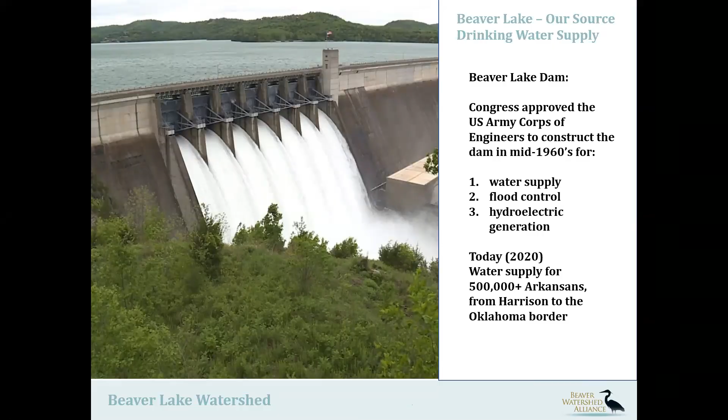We do quite a bit of education and outreach. We reach over 25,000 landowners through mailers, programming, and our e-news. We also host these quarterly speaker series and BMP workshops, field tours, and farm days on site to work with landowners directly on implementing best management practices. We help install native plants and trees and other best management practices along riparians and critical landscape areas.

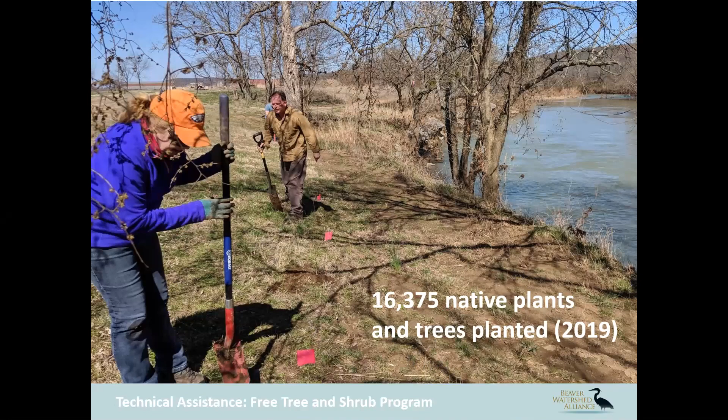We also do a lot of scientific investigation, working with partners to understand some of the issues and challenges we face, such as sediment, which is the number one pollutant in the Beaver Lake watershed area. We also help to remove low water crossings and reconnect miles of streams.

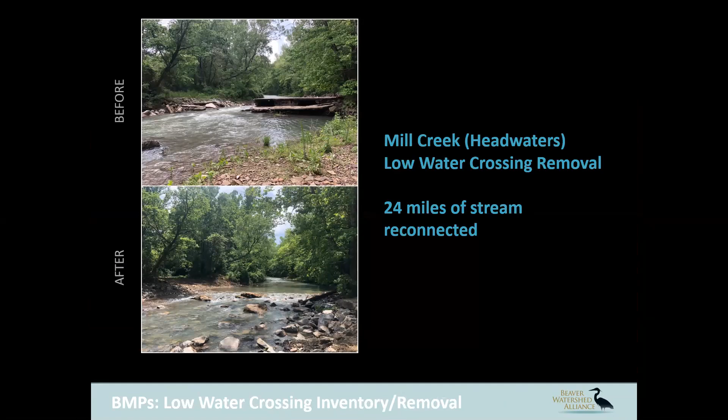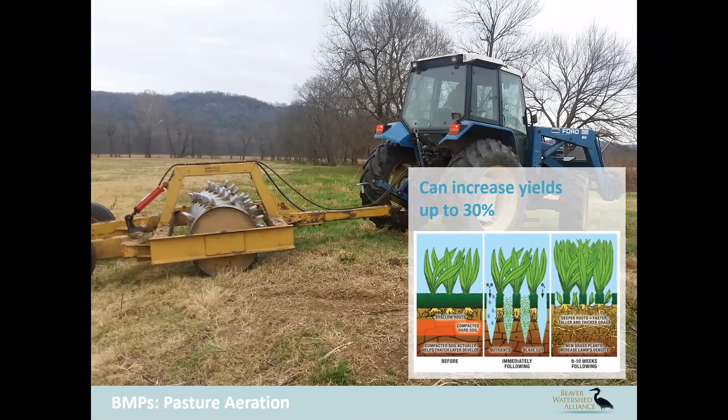Our watershed is primarily forested, about 70% forested area, so we work a lot with landowners, cities, and counties to manage forests. We also help farmers with pasture aeration to help water soak into the ground and increase their forage and production. And we offer on-site technical assistance at the parcel level.

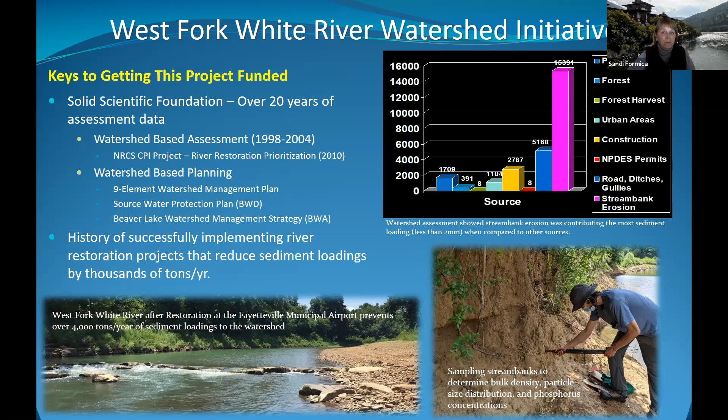Then our organization, the WCRC, with partners, we've been successfully implementing river restoration projects in Northwest Arkansas for more than 10 years. And we've quantified the reduction of sediment loadings. So those items, I think, played a major role.

Then another part was that we had a history of strong partnerships in Northwest Arkansas, and even specifically in the West Fork White River and Beaver Lake watershed. And we used the data to support measurable outcomes.

That's how we were able to bring in a lot of the partners. They wanted to see, well, if we give you this money, what kind of results are we going to have? How is it going to improve the watershed? And then we used the federal funding to leverage non-federal funding and vice versa.

And we also developed clear partner roles and commitments. So if you decide you want to apply for an RCPP project, I'm not sure if they still require this, but at the time we applied, you actually had to have a letter of commitment for your partner funding. And in some cases, that can take up to a year to get that level of commitment.

And then the project is located in Beaver Lake watershed. This is our drinking water source for Northwest Arkansas. So it's a very important resource that needs to be protected. And that played a major role, I think, in us getting selected.

And there's several 303D listed streams. It's a non-point source priority for nutrient reduction.

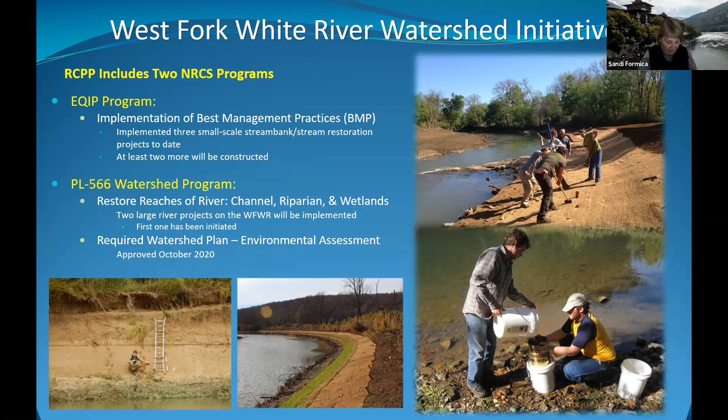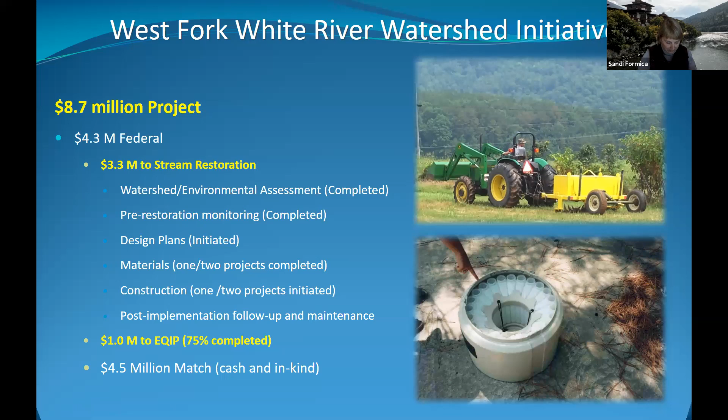The funding we brought in through this RCPP was $8.7 million. 4.3 million of it is federal dollars, and the match for our application was 50-50, so we had a little more than that, 4.5 million in match. 3.3 million of the federal dollars is going towards stream restoration, and 1 million went towards EQIP, and we've completed about 75% of the EQIP funding. So that's an overview of the West Fork White River Watershed Initiative, an NRCS RCPP project.

Now I want to talk about our restoration approach, which I believe also helped us get this project. We use natural channel design principles to develop designs that restore the channel, riparian, and wetland areas for unstable reaches of rivers and streams. I want to describe this in two parts. Channel restoration first—a lot of times I believe too much emphasis goes on this. It's important and has to be done right, but we also need to consider how we're going to restore the riparian areas. The channel restoration is based on stream form and stable reach examples.

We restore the hydrology, wanting better defined riffles, runs, pools, and glides that provide habitat and also help treat water. We account for sediment transport. These projects require extensive permitting that takes months and sometimes longer. We stabilize stream banks—the end result is stable stream banks. Almost every project requires heavy equipment construction.

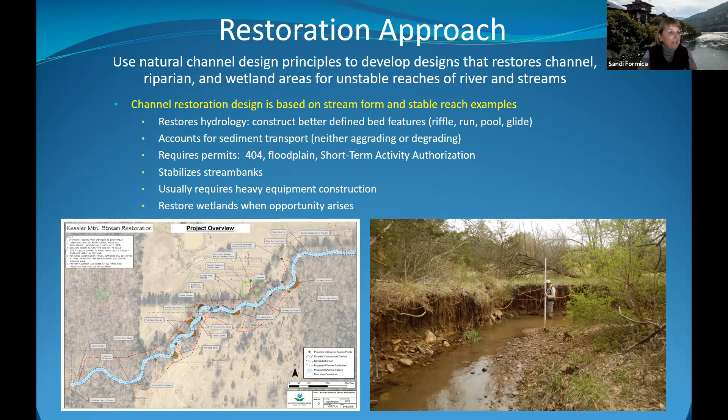For the riparian part, we restore by integrating vegetation establishment and management into the design. This is a critical component, because if you just go out and build something without establishing the vegetation, you won't have long-term protection of the restoration. We use all native vegetation, basically controlling erosion using live plants. It reduces water velocities, and we utilize techniques we've developed to establish this native vegetation quickly, because you can have a flood right after you build a project.

Another technique we've done is we actually incorporate plants during construction. When we build our soil lifts, even when we build our toewood, we go ahead and incorporate native plants. We only use species local to the ecoregion, and we remove invasives. This improves the local ecology, and native plants also adapt easier.

The photos you see below are from Tanyard Creek. We've already built the channel part, which is a toewood bench, and you can't see most of it. On top of that toewood bench, we've done layers of floodplains—this is our inner berm elevation, this is our bankful elevation, and this is just slightly higher than bankful. All those flags are native plants we incorporated during construction.

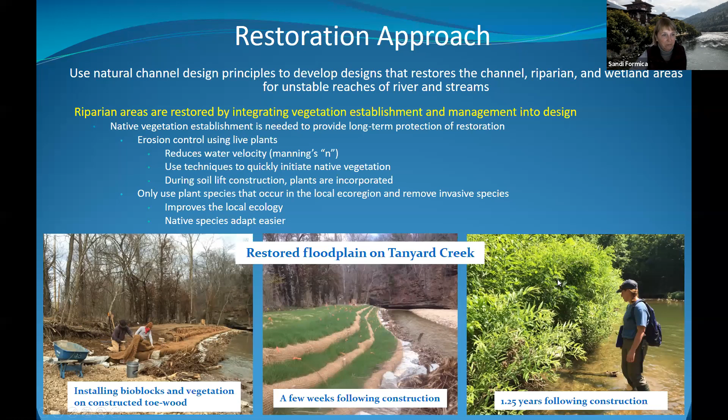Here we're building those soil lifts, and then this is what we got 1.25 years following this construction. This is a mix of at least 40 or more species of plants native to the local ecoregion, and you can tell this is really going to slow the water down. So this is just an example of what you can achieve.

So part of our restoration approach is after we've completed construction, we continue to do ongoing inspection, maintenance, and flood repairs. Because when you build in a river, it's going to flood, so it's better to be prepared for that instead of running around after it happens, looking for funding.

So we inspect our projects following flood events. We conduct ongoing maintenance for at least 5 years. Really what that is vegetation management, and it takes about 5 years to get a good establishment of your natives, and we also treat for invasives.

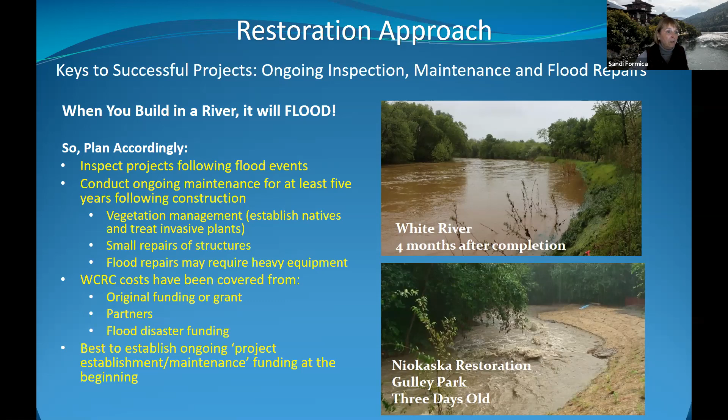Another part of our restoration approach is that we conduct monitoring of the streambank erosion, and we estimate annual sediment and nutrient loads. So to do that, we actually sample stream banks and determine bulk density, particle size distribution. We also analyze for phosphorus and nitrogen.

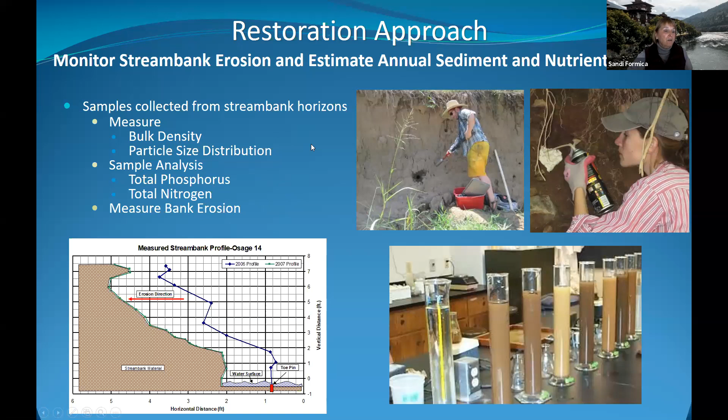We did not include that in the RCPP project, the nutrient part, but we do that for most of our projects. And we also measure bank erosion, and from that you can get your load reduction. So we have to collect that kind of data prior to restoration.

These are projects that we've completed in Beaver Lake watershed, and annually they're reducing or preventing sediment loss to the watershed by these numbers here. The total is 15,000 tons a year. So you can see how, after 10 years, this is 150,000 tons.

So these projects, from reducing the amount of sediment going into the watershed, are highly effective. And then, as you're going to see when I give the examples, they also provide both aquatic and terrestrial habitat and improve the local ecology. So you get a lot of benefits socially and from a water quality standpoint for your money.

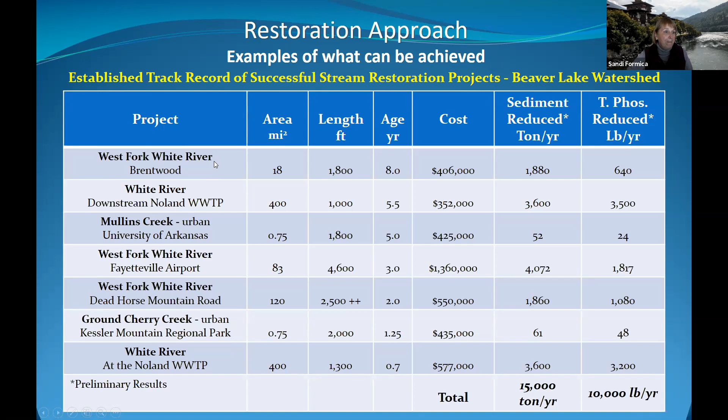Okay, so that was our restoration approach. Now I'm going to talk about, I'm back to the West Fork White River Watershed Initiative, and I'm going to talk about the EQIP program that was part of our RCPP project.

So at this point, we've completed all the landowner outreach, and we've also completed development of conservation-based plans. We've done like 191, and we've exceeded our target on that. And then eligible landowners engage in EQIP contracts to implement recommended BMPs. We're 75% completed on that.

And within those EQIP contracts, we have had 5 landowners that have contracts for stream bank restoration projects. We've implemented 3 of those projects. There's 2 more that we'll be implementing in 2021. And then, because we still have 25% of the money, there's a potential for 2 or 3 more contracts for stream banks.

So I'm going to talk about and show you guys the 3 projects that we've implemented using EQIP funding to date. Okay, so the first one is on Rock Creek, and we used EQIP, the 580 stream bank and shoreline protection, to construct a toewood bench with vegetated soil lifts.

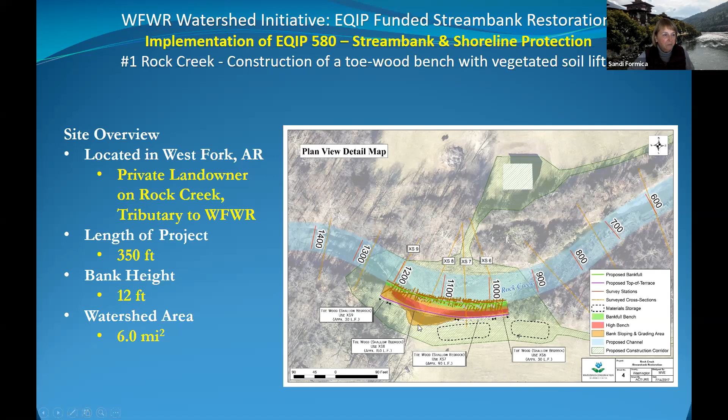And so this is the toewood bench design. What this does is bedrock was about 4 or 5 feet from the water surface. We actually built this on the bedrock. We use logs to create, with the root balls facing the stream, so that slows the water down, it stabilizes the toe of the bank, and then we build these soil lifts back on top and slope the bank back.

And we use all natural materials, trees, brush, gravel, provides roughness and reduces near bank velocities. And this toewood also provides cover for fish and wildlife.

So now we've constructed, if you go back here, this point is way over here. We've reconstructed this stream bank completely. And this is the toewood, the root wad sticking out. This structure goes another 4 feet below the surface.

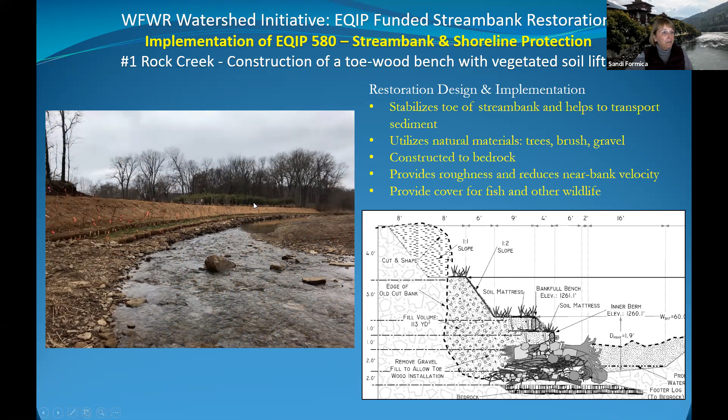And then to complete the finished cross section, I talked about creating inner berm and bank full features. So that's these two. And so here you can see, this is not quite a year since we built this. Actually, this is not quite a year, and this is the following year.

What these soil lifts do is they provide a soil medium to establish healthy vegetation. As I said, we're pre-planting during construction. It's all natural materials that are going to degrade. We use plants native to the Boston Mountains ecoregion, and our plants were bare roots, plugs, pots, and native grasses. We put native grass and wildflower seed throughout the entire site.

So the old cut bank is way back here. That was the 580. So this project, we did 4 more EQIP practices up on the terrace, including riparian herbaceous cover and forest cover.

So all of this is planted with trees and shrubs and will eventually go back into forest. But on the other side of that, we just did herbaceous cover, so that's just going to be wildflowers and native grasses. And then we also had mulching and tree and shrub site preparation.

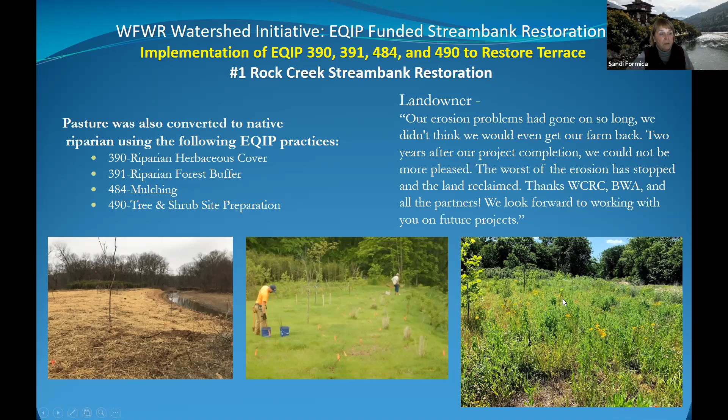Okay, this is another EQIP funded stream restoration. I call this more of a stream restoration because we did more than one bank, and we did a couple of riffles, actually 3 riffles. It's a smaller stream, a 2.3 square mile watershed, with smaller banks. We did about 350 feet. It's an unnamed tributary to the West Fork.

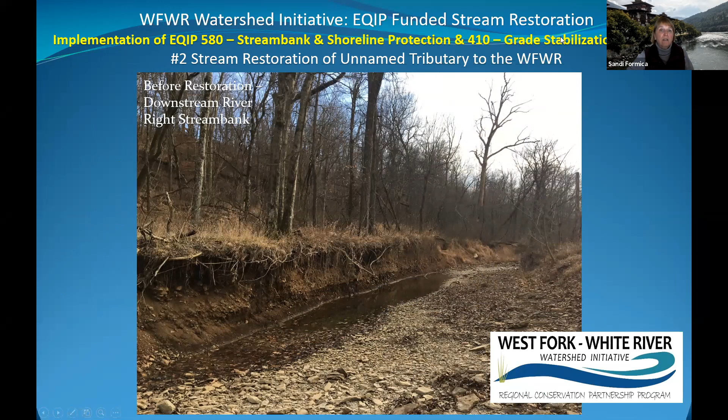This is the upstream end of the project before restoration. And this is the downstream stream bank before restoration. So on this one, we're implementing 580 again, and also 410 grade stabilization structures.

So the restoration design is here. This is the upstream area, so the water's flowing this way. We did kind of a toe wood rock combination because we didn't want to dig out soil and trees. We did mostly rock down here for the same reason, and I'll show that later. We use the structures to increase the pool depths and keep water on the toe wood and to prevent lateral migration of channel head cuts.

So without these, you can end up with a head cut through here. The structures also help to direct the flow to the center of the channel, and it stabilized the riffle and the other bed features.

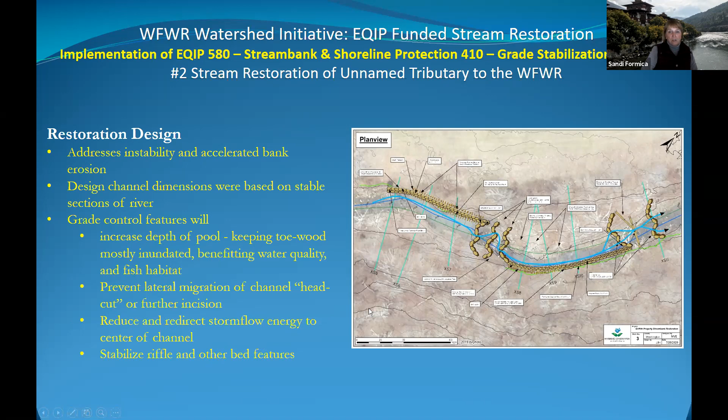So I'm just going to show you the transformation of the upstream end first. This particular landowner was really nervous about doing this project. She was worried that it wouldn't look natural. But after it was done, she loved it, and you can read what she said about it.

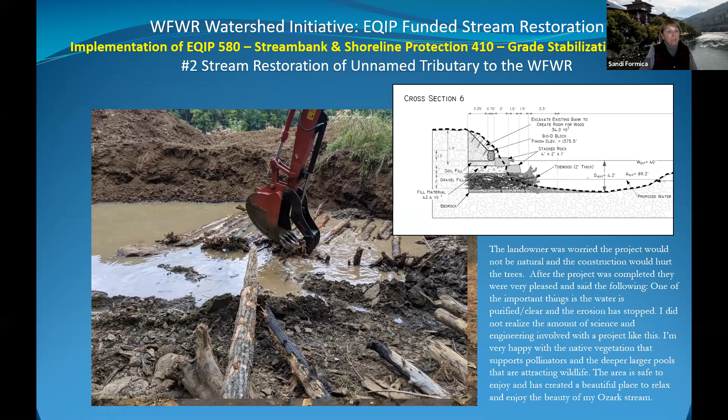But anyway, this upstream end, we did toe wood at the base, but because this stream is so incised, we decided to go with a layer of rock on top of the wood, and then we went to a Bio-D Block to establish the native vegetation. And here we are building the toe wood. Again, I'm downstream looking upstream. At this point, we've got the wood and the rock, and we're building the Bio-D Block on top.

And then this is our first grade control structure, and these rocks are all footered with 2 more rocks. So this structure goes another 4 feet below the water surface, and there's 2 rocks holding it. If you just put these rocks on the gravel, they will fall into the stream on the first flood event. And then this is our sill going back in this way.

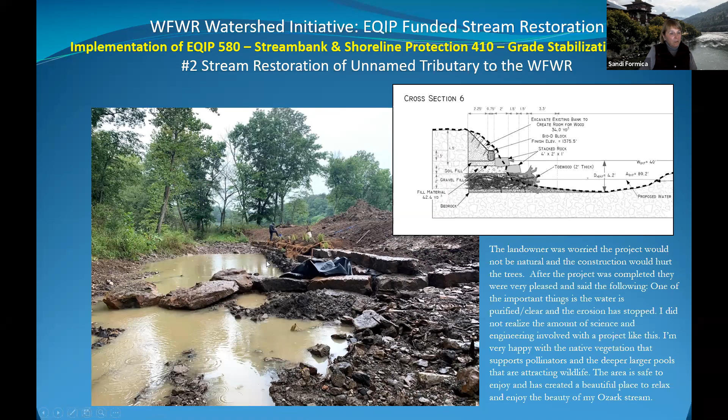Okay, so this is that first structure. We also put fabric in here, and there was clay on site, and we used the fabric and clay to seal off this water. See where the water level is now. And then once we're completed, you can see this structure is backing the water up on the wood. So that's the structure that you saw in the previous photo.

This is the second structure. The sill goes this way, and there's a sill that goes this way with this structure. And then there's a third structure here. And then this is our Bio-D Block, and all the green is a nursery crop that we put out to get grass established immediately.

And then this is the same site, from upstream looking downstream. So here's that first structure. And we actually reconstructed this riffle here. And then this is the restored stream bank.

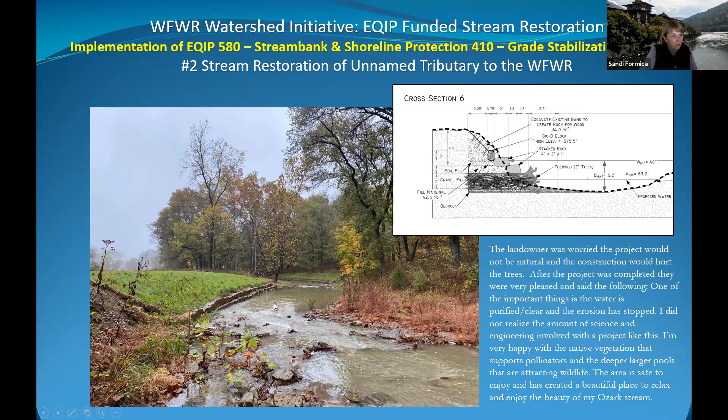Okay, this is the downstream area. The reason why we went with a rock toe here instead of toe wood is we didn't want to take out all these trees, and that's what we would have had to have done to put toe wood in there. Even though we did move the channel back out, it was too much to put wood in there. We didn't have enough space, and we would have had to cut all this down.

So to tie it into the grade below the project, we used 3 structures to drop it down. This first structure backs the water up on the wood. At this point, we have constructed the rock toe. There was no water in the stream. These rocks are sitting on the bedrock. And we haven't done anything to the bank or added the soil mattress yet.

And then this is downstream, the first structure downstream. This is the structure that's going to back the water. Notice where the water level is here. We're going to end up backing the water level up over the second rock with this structure. You can kind of see our footers. There's another level of footers under these rocks as well.

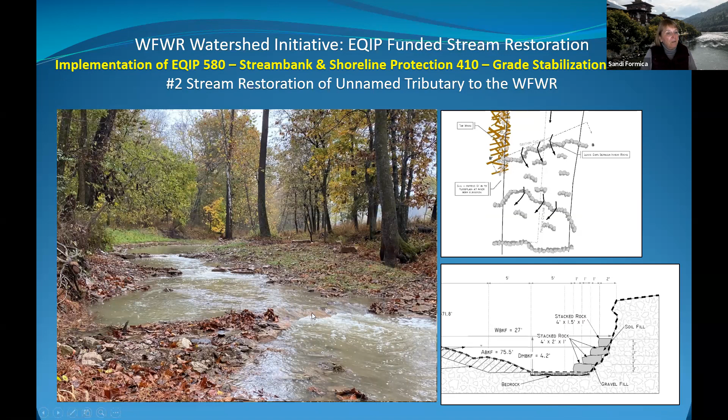And then this is our 3 structures. You can see they're backing the water up, but just note that these structures all go to bedrock, and they go 4 feet. There's another 2 rocks over them.

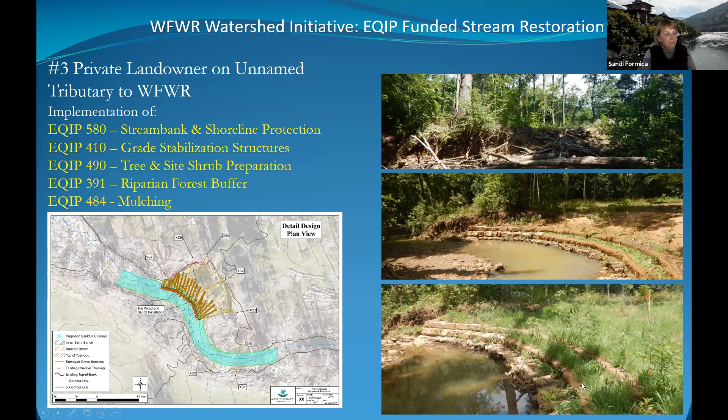And then here's the EQIP funding that we got and the project cost. So the first project on Rock Creek, we received $92,000. The cost of it to implement it is $142,000. This project's about a year and a half old, and we've spent this much on maintenance, mainly to get that vegetation established. And so that's our total cost to date.

This is the amount of funding we got, and so this was, the difference between these 2 is paid through the other funding we have through the RCPP. And then we've got $93,000 is our total on project 2. That's the unnamed tributary where we did a stream restoration, and this is what we received from EQIP. Implementation cost was $92,000. And then this is what we spent on maintenance. We just finished that project a couple months ago.

And then project number 3, which is also about a year and a half old, we received almost $39,000. It cost $45,000 to construct it, and we've spent $3,600 on maintenance. So you can kind of see the smaller the project, the more the EQIP cost covers. Really, you can't build projects with the EQIP funding that are much bigger than the sites that we showed you.

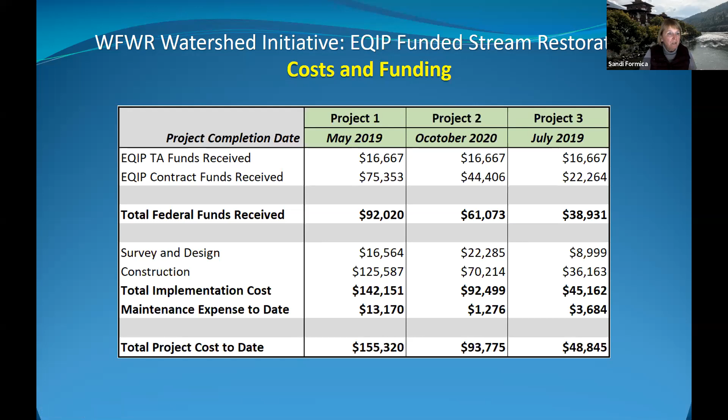So now I'm going to talk about the large scale river restoration project utilizing PL-566. This is why we needed the PL-566, to tackle these bigger projects. The purpose was to restore reaches of river utilizing natural channel design principles, improve water quality, enhance fisheries and other wildlife. And to be able to get PL-566 funding, you have to have an approved watershed plan. So I'm going to talk about that first.

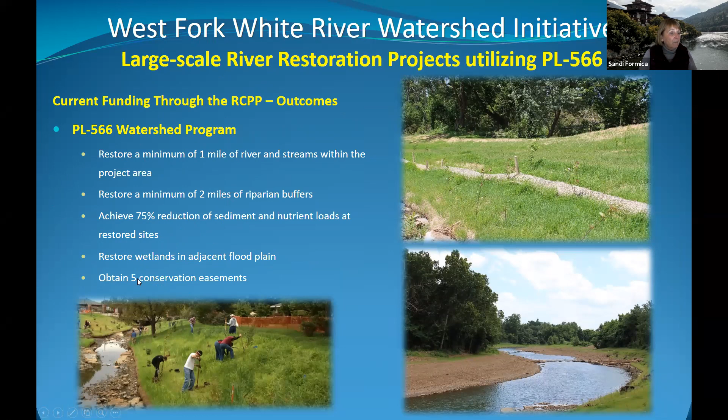Well, hang on. So what we committed to through the RCPP project under PL-566 is to restore a minimum of 1 mile of river and 2 miles of riparian, reduce sediment by 75%, and restore wetlands in adjacent floodplains, and obtain 5 conservation easements. And we have gotten at least 3 of the 5 conservation easements at this point.

Now I'll talk about the watershed plan, because that's a huge part of this project—you can't spend a penny of that money until this is approved. The purpose of the watershed plan was to address the channel instability documented in the West Fork of the White River watershed, by designing, constructing, and maintaining large-scale river restoration projects. These projects involve multiple landowners and use the Public Law 566 authority.

What do we get from it? It results in the reduction of erosion, land loss, and sediment loading to the West Fork White River and Beaver Lake watershed, while improving aquatic, riparian, and wetland habitats.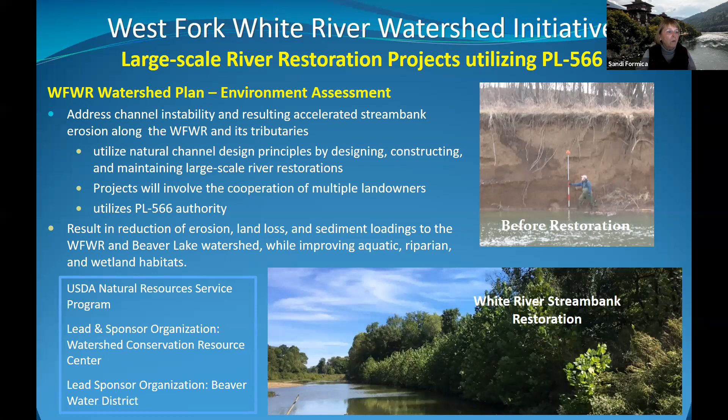This is a USDA Natural Resources Service program. We were the lead organization for the RCPP, and we are a sponsor organization, Watershed Conservation Resource Center. The lead sponsor organization is Beaver Water District. You can't do these projects unless you have a lead sponsor organization—they have to meet certain requirements to qualify for that.

We had to show in our watershed plan the need for sediment reduction. We had a 303(d) listed stream, West Fork White River, for excessive silt loads and high turbidity. The West Fork is a major tributary to the White River, which forms Beaver Lake, the drinking water source. This project can help prevent expensive treatment of drinking water in the future—that protects our drinking water source.

It's a local and regional priority area for sediment reduction. Under the NRCS, it falls under the Mississippi River Basin Critical Conservation Area. It's an impaired 303D stream at the state level, and it's also a non-point source program priority at the state level. All of this was part of the watershed plan.

The 2004 watershed assessment told us that 66% of the annual sediment loading was from accelerated streambank erosion in the West Fork White River. The NRCS CPI work identified 29 unstable reaches—a reach being several stream banks, not just one—that needed restoration, and it prioritized sites. The project also supports watershed planning in the Beaver Lake Watershed Protection Strategy; it's one of the BMPs recommended in the strategy.

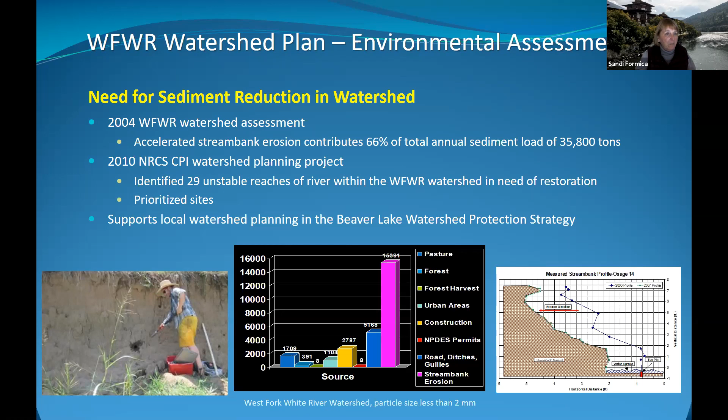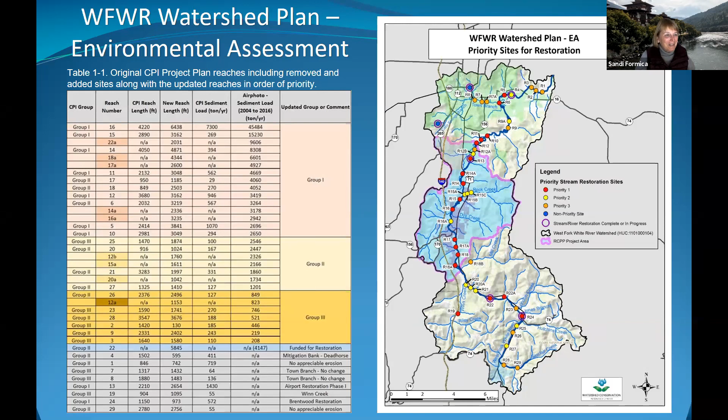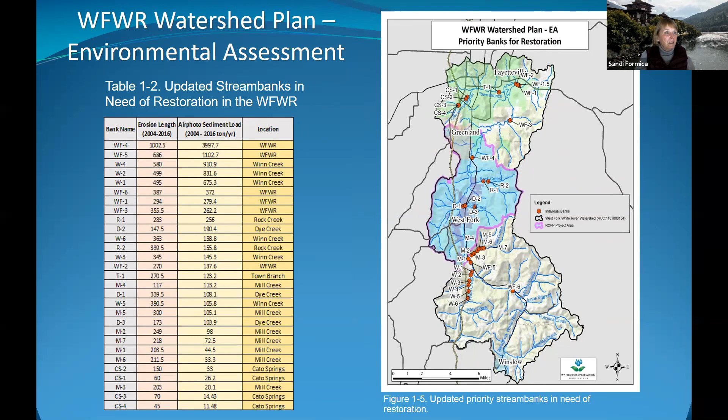So what we did is update what we did in the CPI—we updated the reaches in need of restoration. Several projects had already been completed. What you see here is the list of sites prioritized between 3 groups. Some were either restored or didn't show significant erosion, so we removed them from the list. It's complicated, you can read the watershed plan, but we still have 29 sites that need restoration. We also identified and updated 29 stream banks that could potentially be standalone projects that also need restoration. This is part of the watershed plan.

So what are the results to date for these large scale river restorations utilizing PL-566? The watershed plan has been approved, and the watershed agreement has been signed by sponsors.

Our lessons learned: we thought it was going to take 2 years, and that was a long time, but it actually took over 3 years. So we've decided, if we do another one of these, we want to do the watershed plan before we get the funding for the restoration work.

Make that a standalone process. We thought we knew what we were doing on that watershed plan—if I had to do it over again, I would have asked NRCS to help us a lot earlier in the process. The NRCS people are fantastic to work with, and they've been great helping us with this project. I wish I would have asked for their help on the watershed plan earlier.

With our current RCPP funding, we are able to do 2 of those priority sites selected for restoration. Part of this, which makes it more complicated, is you have to have signed access agreements with a 20-year commitment from any landowner that participates in a PL-566 project. To date, we've got 6 of 8 landowners that have signed, and we filed them at the county courthouse. The other 2 are going to sign—we're just working out some stuff with the lawyers.

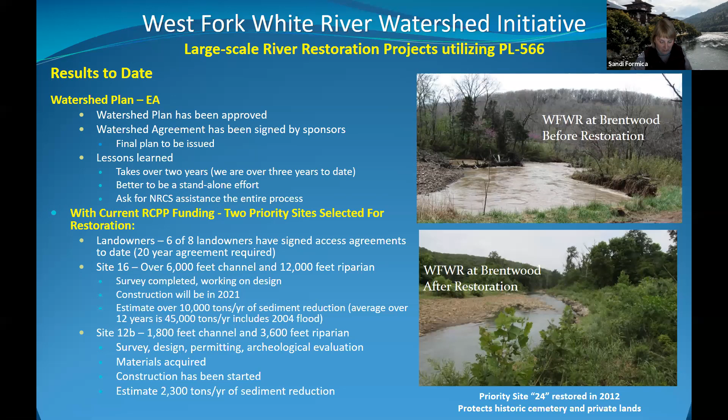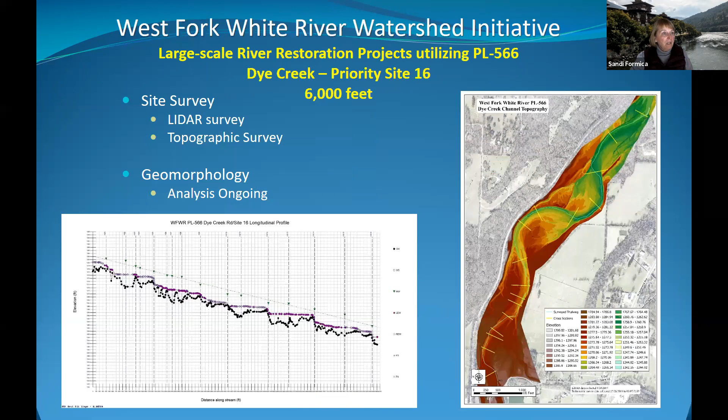I'm going to quickly go through Dye Creek. We've completed all the surveying, and this is the river. You can see there's 1, 2, 3, 4, 5 very large eroding stream banks that will be addressed through this project. It's over 1 mile long.

We actually meet our commitment with this project, but we feel like we have enough funding to do the other project as well.

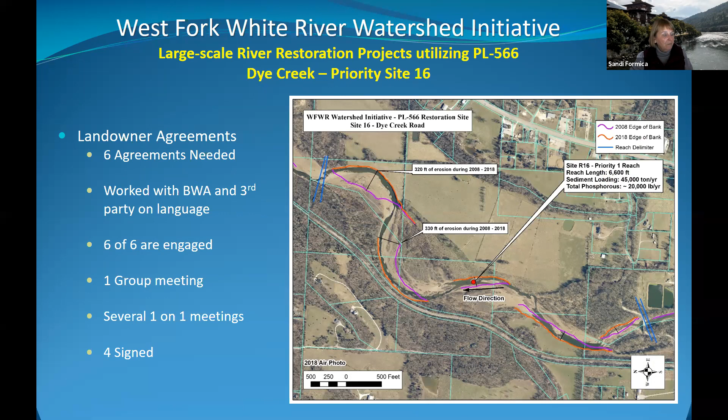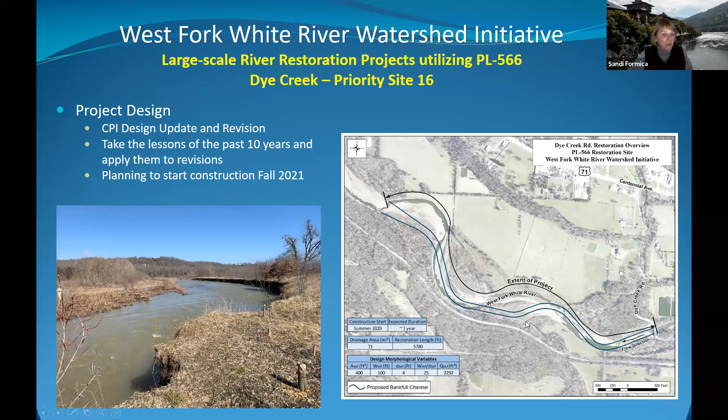You can see the design pattern. We actually did a design through the CPI, but we're having to update that because the river has changed drastically since we did that design. We hope to start construction on this project fall of 2021.

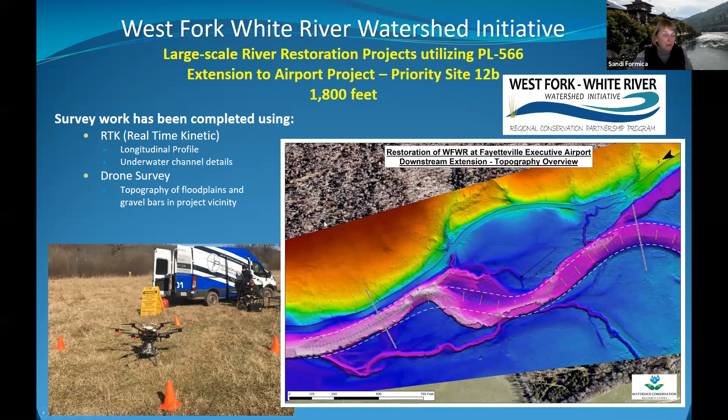All the survey work has been completed, and the restoration design—boy, I'm running out of time here, you guys. I'm gonna go through this quick.

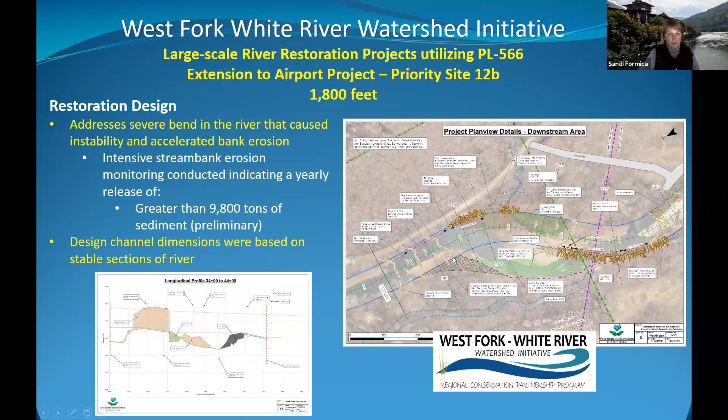Here's our design, just to show you quickly. Here's the old channel, and this is the new pattern. We're doing toewood here, here, here, and there's actually an upstream part of this where there's more toewood. Then we have structures in these areas.

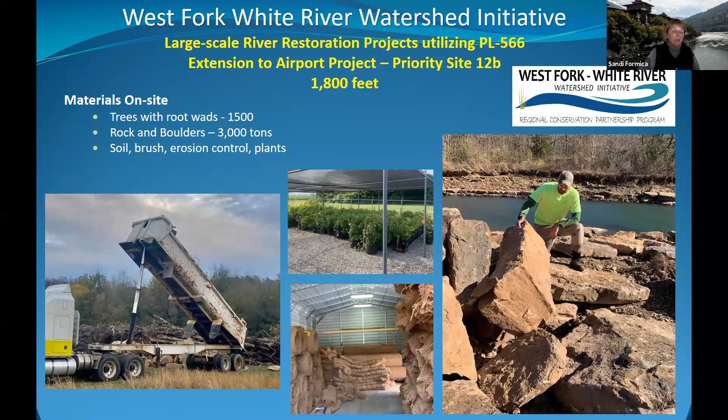This is our vegetation—we'll be incorporating over 5,000 plants, 48 species. We've gotten all of our permits. This just shows you all the massive amounts of materials that we've acquired.

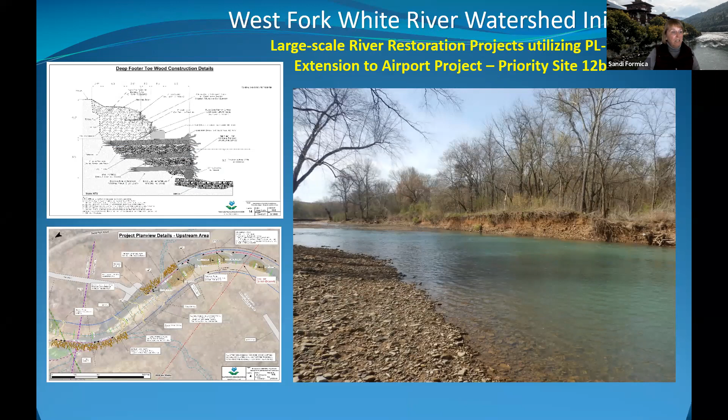Here are the stream banks. We started construction in October, building toewood and structures. Right now, we're mainly focusing on the toewood. Later, you can see that.

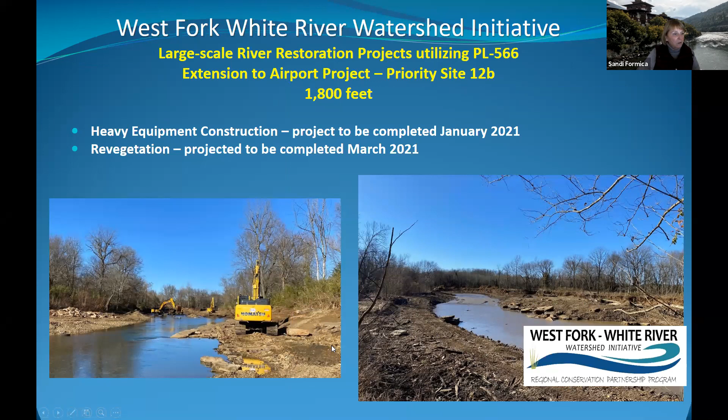This is a completed toewood bench, and there's another completed toewood bench here—we'll be starting the structure soon. This is the upstream area. I took this picture the other day of the restored section.

I just want to make the point that you can get lots of benefits from this kind of work besides protecting our drinking water source. There's recreational benefits, economic, and education. And that's it.

Let me know if you guys have any questions.

Well, thank you, Sandi. There are a couple of questions here. We have 3 questions in the queue. One, going back to the stream restoration, kind of how that works.

We had a question on how are the rocks tied together? Rock bolts, rebar, etc.?

They're not. So that's what's important—we place these rocks in a way where they interlock by themselves and they're footered, so they're not tied. Everything is natural; we do not use any rebar or concrete or anything like that. You have to build them according to the design, and they will stay in place.

We always use an overlap effect on the structure, so the rock downstream—the bottom footer rock—will be the furthest out, and they're stacked cascading, and that helps reinforce it.

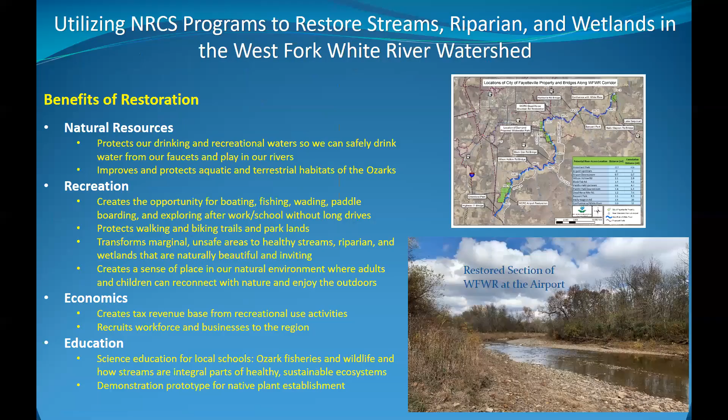And one more question here. How many volunteers or what local agencies, stakeholders, et cetera, are typically involved in planning and implementing the restorations? Well, so we have 14 partners on this project. So people that are directly involved, it's quite a few, because the permitting introduces even more entities that are involved.

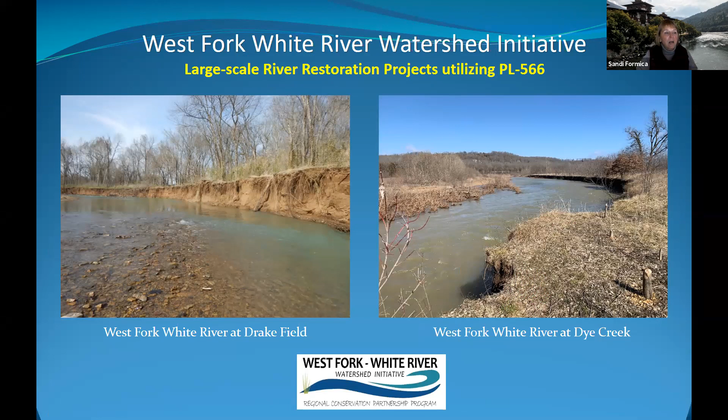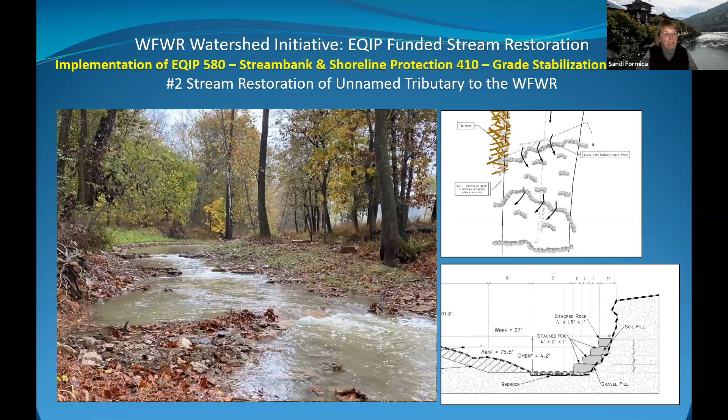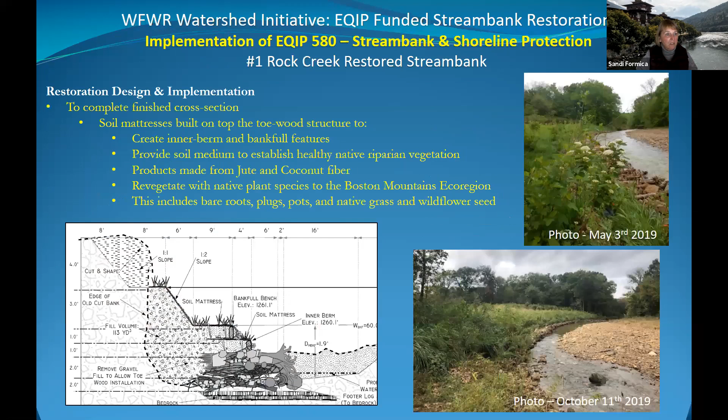But most of our projects, at a minimum, whether it's this one or not, I want to thank the NRCS and all of our partners for helping us to make this project happen. I think it's just really good for our ecology, water quality, and for society in general. It's a lot of slides here.

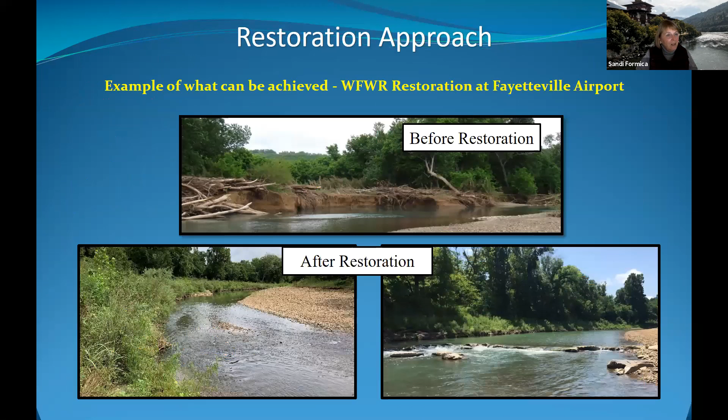So we do not depend on volunteers to get these projects done. But we do bring volunteers in to help with the plantings, sometimes with invasive removal. They help us collect native seed. We try to collect indigenous seed to put out at these sites, and they help us process it. So we utilize volunteers from more of an education standpoint. We feel like these projects are high risk, and we're able to make them work, and they're great for the ecology. But we don't want to depend on volunteers to do them. We want to make sure we have the funding and the capability to design and implement them, and then bring the volunteers in as extra help when needed, and as an education tool.